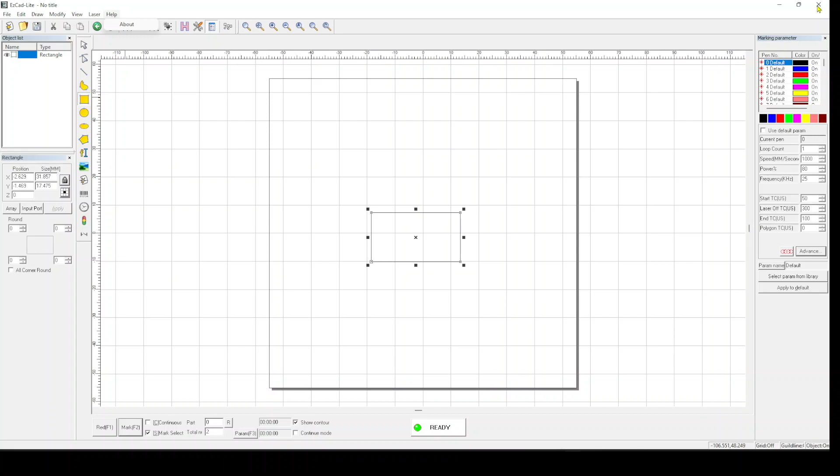It crashes every now and again. But the biggest question I see on the Facebook pages and some of the forums is, can you use full EZCad2? And the answer is generally no.

If I open the EZCad2 folder here, this is what I downloaded just a couple of days ago. It's EZCad 2.14.11, and they are quite right - if you try to open it, it'll say can't find dongle. The software will work in demo state, which is fair enough. Not a lot we can do.

You'll see that wobble's in there, but there's nothing we can do because this won't actually work in demo state. So let's get rid of this.

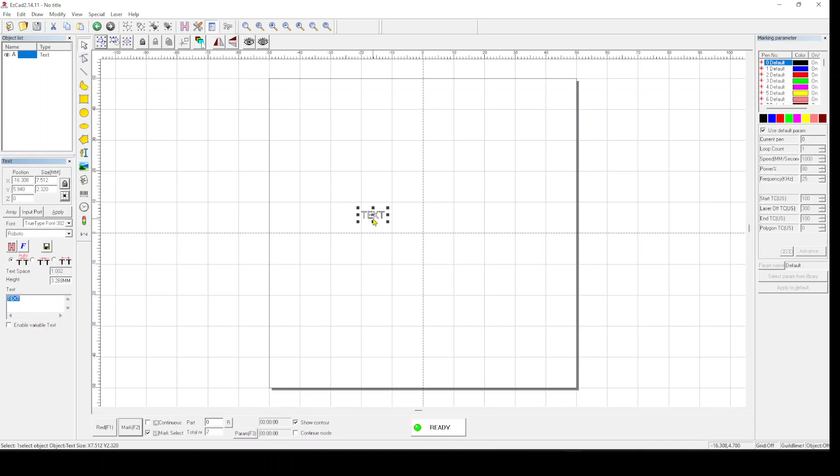However, if we come over here, I've got a different EZCad2 icon. If I open this up, it's not whinging, it's starting. Let's put a bit of text on the page because I feel I need to show you it actually engraved.

Okay, so we've got a bit of text. Centralize it out on the page. Let's hatch it. Now...

If we go down to the advanced menu, you'll notice that wobble is there, and it does work, along with whatever these other extras are in here. I've not played with them yet.

But more importantly, if we go up to the laser menu, there's a lot more under there now. So we've got the rotary marking and the split mark that we had before, a few other options, but project mark is there and it works.

This is where you can change the engrave very slightly for going on circular items without the need of a rotary device.

And you'll notice we've got a special menu up here which allows you to do some of the special things like read face 3D from STL file. Now you can load the STL files for engraving deep 3D images from that.

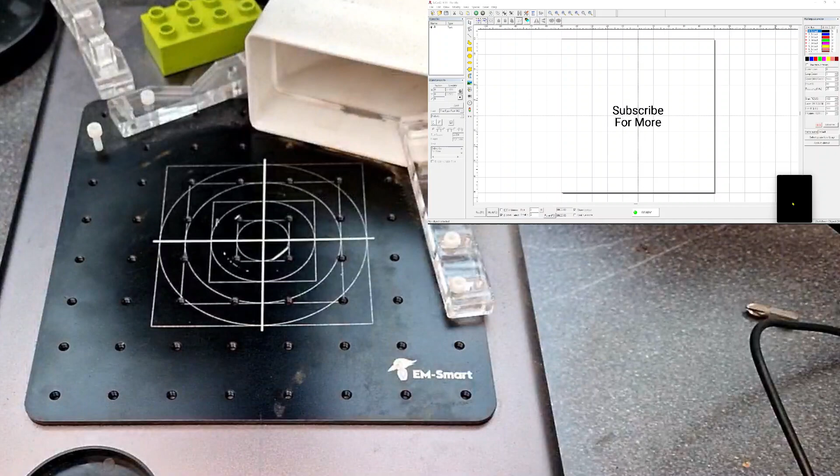Let's just bring this over. So there's the bed of my engraver. Just to demonstrate that EZCad2 is working, there is a business card.

I always use a focal stick just because I find it more accurate than the little dots. That'll do for now.

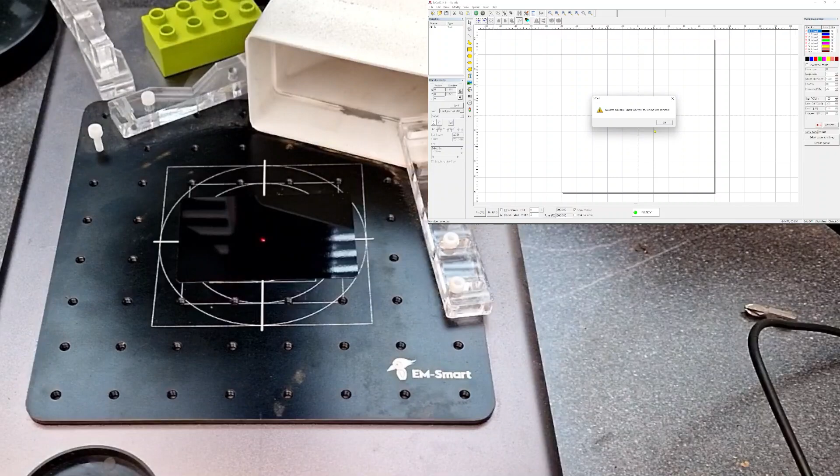Now, if I click the red light button, if I select the text first because I've got only Mark selected, you should hopefully see now it's showing the image in the middle there. If I stop that.

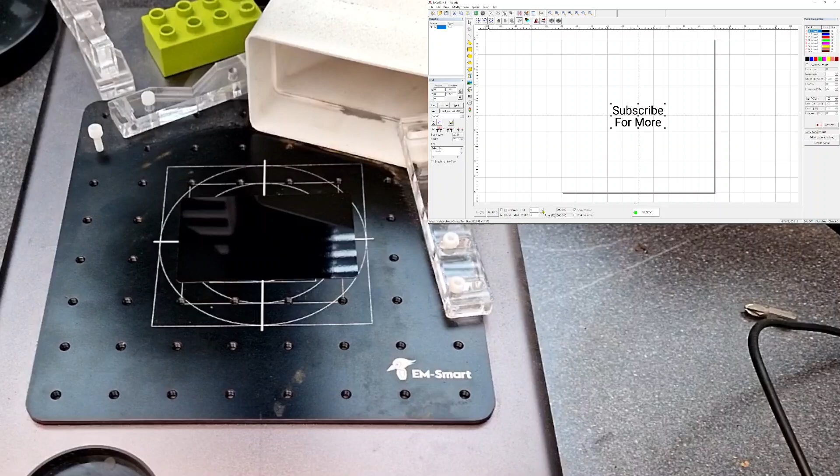Change total number to 0, so it only does one mark. It's going to do a crosshatch on that.

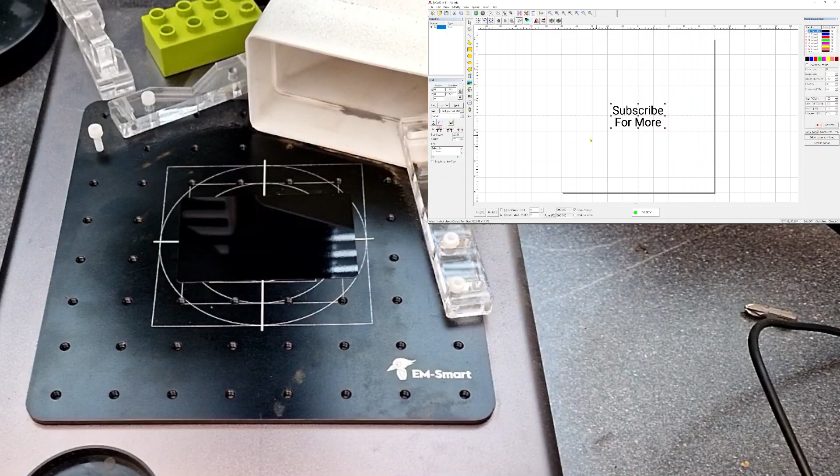Let's just put still white finish on that. Let's click mark.

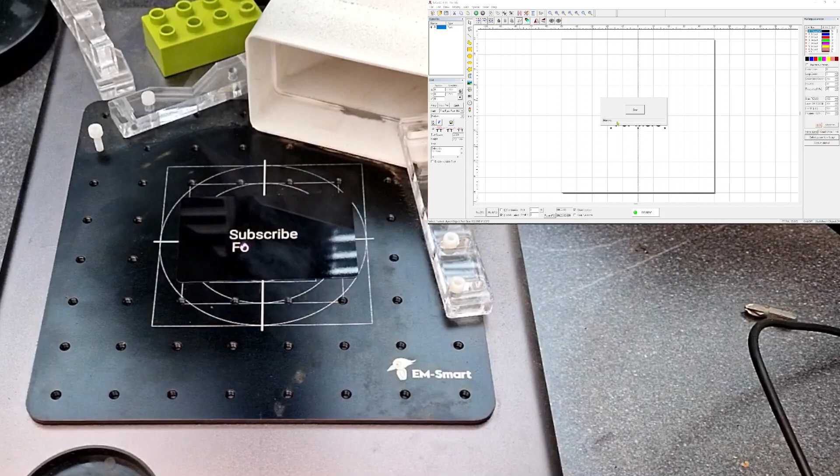And there you can see EZCad2 running on the EM-Smart 1. Something that people keep insisting can't be done.

Let's just put the finishing touches on that. So that was that. Okay. So that's that done. Just demonstrates that it can be done.

Now, where do I get this? This is called the EZCad2 Community Edition. I downloaded mine from Laser Master Academy. I am a paid member.

And if you log into masters.lasereverything.net and you go down to topics, and we go down to downloads, and we scroll down, EZCad2 Community Edition. Now this is the version that also allows you to run EZCad2 in full operation mode without the engraver turned on.

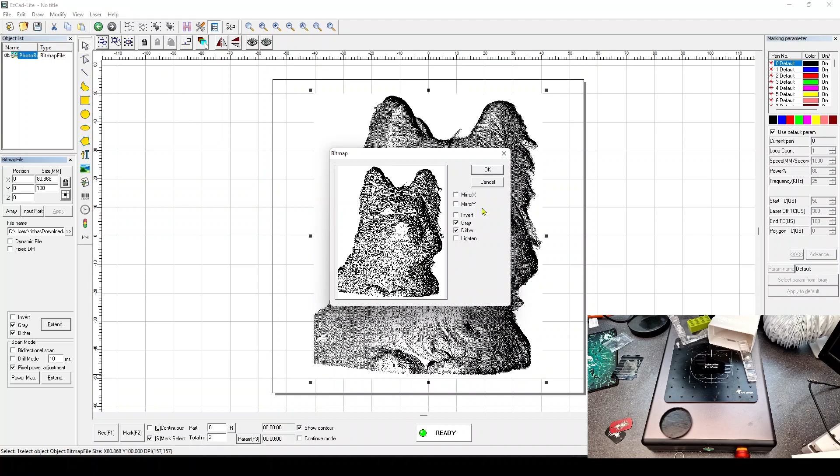When you bring in a bitmap, you've got menus down in the bottom left here. You've got the power map for bitmaps. You want to check that. You want to check what's selected in EZCad Lite here for all of these options.

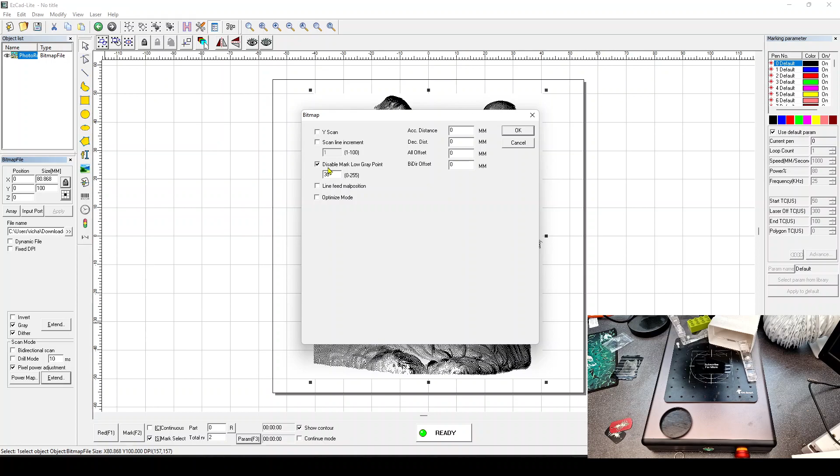Okay, one that I found quite important was this disable mark low grey point. It's set on 30 in here, and it was set at 0 or disabled in EZCad2. That changes the way that these are done.

So again, if we open EZCad2, go through, make sure all of these, there is a couple of extra menus, just leave those as they are. But again, just go through, make sure everything's set up.

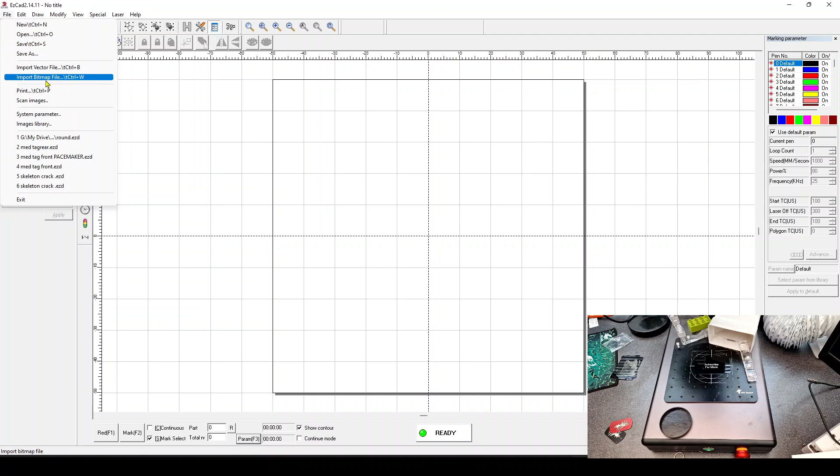And again, just bring in an image file, and go through these again. Just make sure that they're all exactly matching, and it will work.

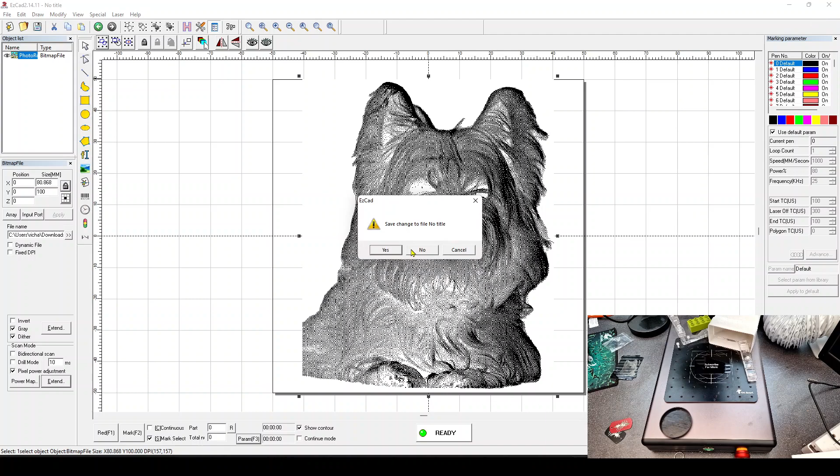So hopefully this has been helpful for you. I will have a load of other videos coming up on how to do multi-layer deep engraves like this, how to line up coins, how to design coins.

Can cover slate, pictures on slate. So take that, put that on there. Doing different colours and different depths on something like that.